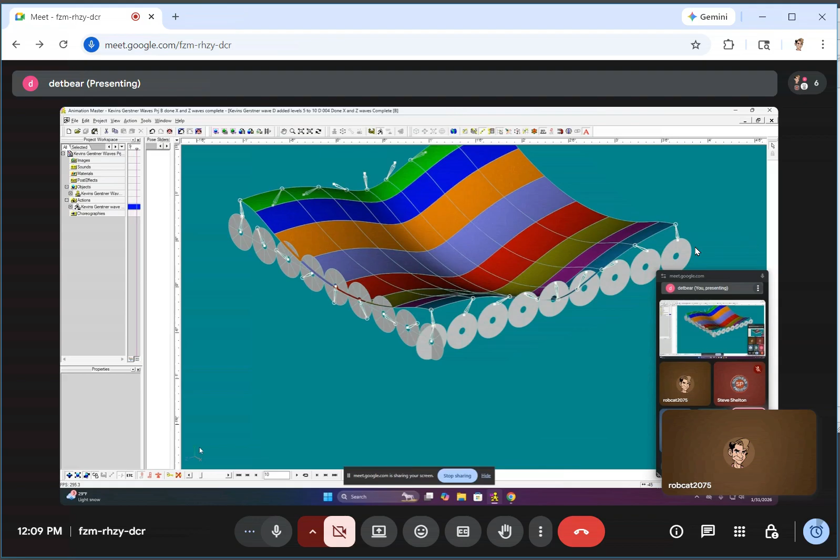So the CPs are not just moving up and down, they're actually moving left to right. And if I show you this from the front, every one of these bones here that are coming the opposite direction are actually moving and parented to this bone so that they're actually moving left to right. Let me show you that.

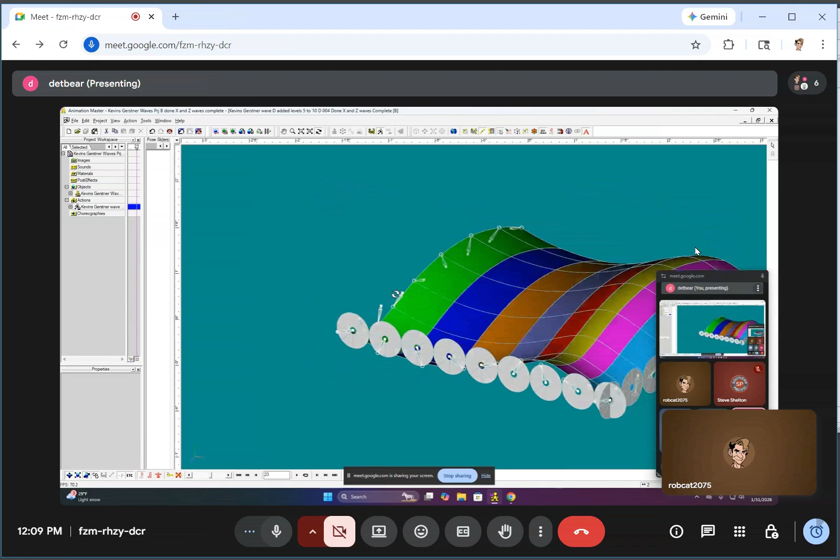Okay, see how they're all moving left to right? But at the same time, they have their own circle coming the other way. They're working also, you see that? How they're also going that direction. That's very effective.

So when it really gets complicated is when you have to go vertically, when you have to go not only diagonally, you mean? You have to go with a diagonal direction. So...

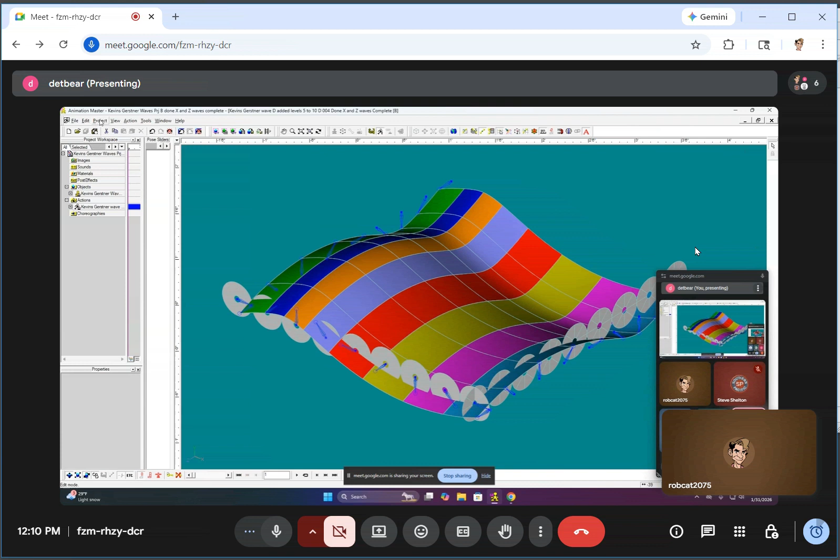Yeah, let me open up my vertical. Okay, so now I've set up spheres that are working this direction as well. This is when it gets wonky.

And the problem that I'm running into with this is just knowing which direction these things need to go in. But you can see this little bone chain here? I left this in here just to show you how all of these things are parented on top of each other.

So now you're getting directions both diagonally, and you can see these splines diagonal are going left and right as well, so they're stacked on top of each other. I'm almost getting seasick.

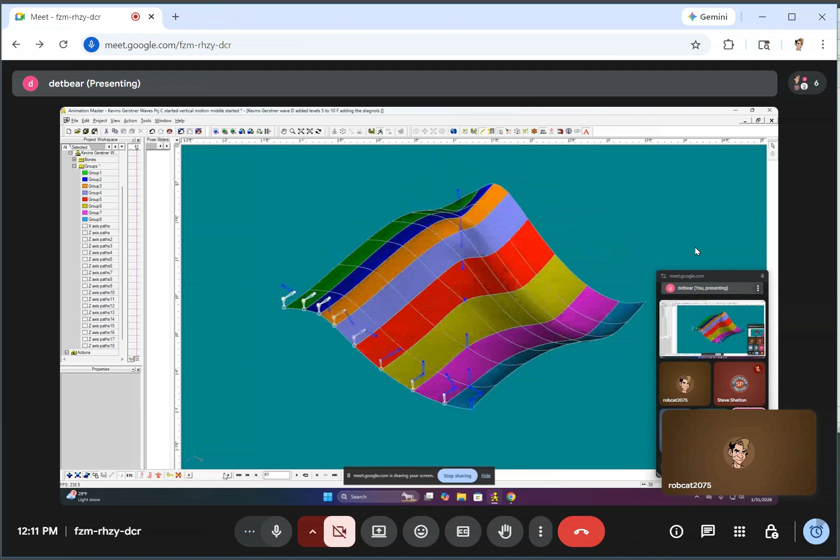It's like, whoa. So then you actually have this where it's working correctly, but it can get very complicated. Yeah, the diagonal is the one I'm not sure I quite understand yet.

Well, it is. Is the diagonal a child of that? It's the child of the second level. Okay, and the second level is the bones, child of the first. Right.

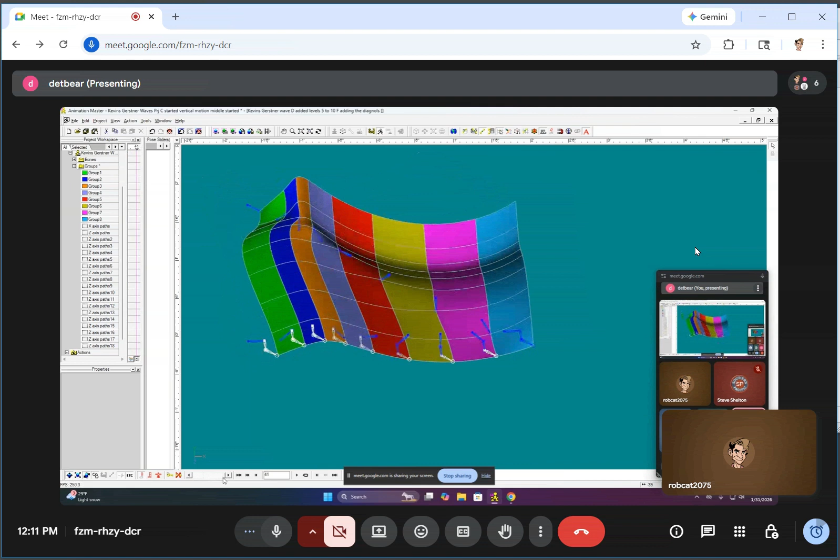And you could stack if I wanted to go also vertically the other direction, because this is just if I wanted to go the other direction, I'd have to do a fourth stack, which you can tell this gets really crazy. And there's more than a million ways you could probably do this.

Yeah, you could make a pose slider that shortens the bone. And you could do that on every level potentially, and you could make it where you could increase the size to basically have some kind of a wave system that would operate driven by vertexes or CPs.

I presume that you want to be able to shorten or lengthen those systems independently of each other, because if you shorten or lengthen the main parent, then everything beneath that shortens as well. You'd have to counteract that somehow, maybe.

I don't know, but the way you could counteract that is, instead of making a bone a child, you constrain it. That's what I'm doing currently, to the tip. Oh, okay.

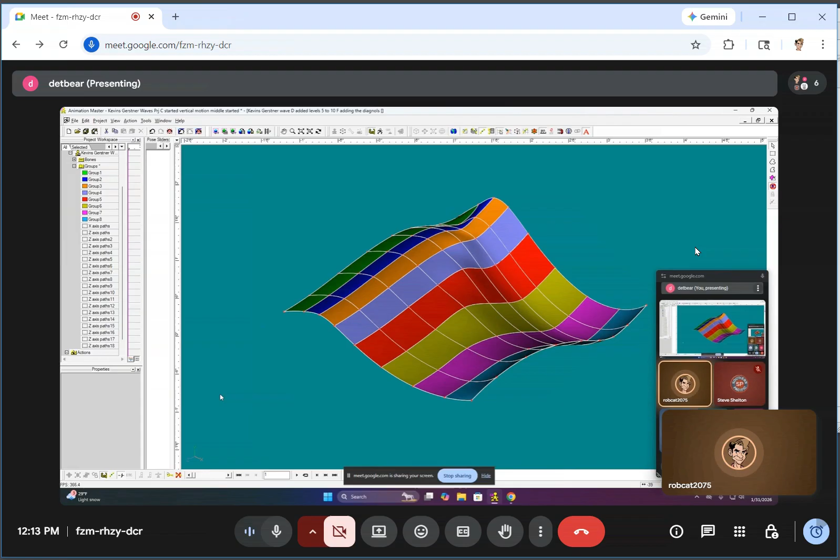So then you should be able to size them independently. That's right. So let's say, I know in a Gerstner Wave system, they have smaller waves on top of larger waves. Does that make any sense? Yeah.

And so my question would be, you'd still have to make it a tileable thing, or you'd have to have it working on a mesh. You wouldn't have to have it tremendous, but it would need to be a decent size. It'd be cool if there was a wizard that could set this up for you. I know, wouldn't that be cool?

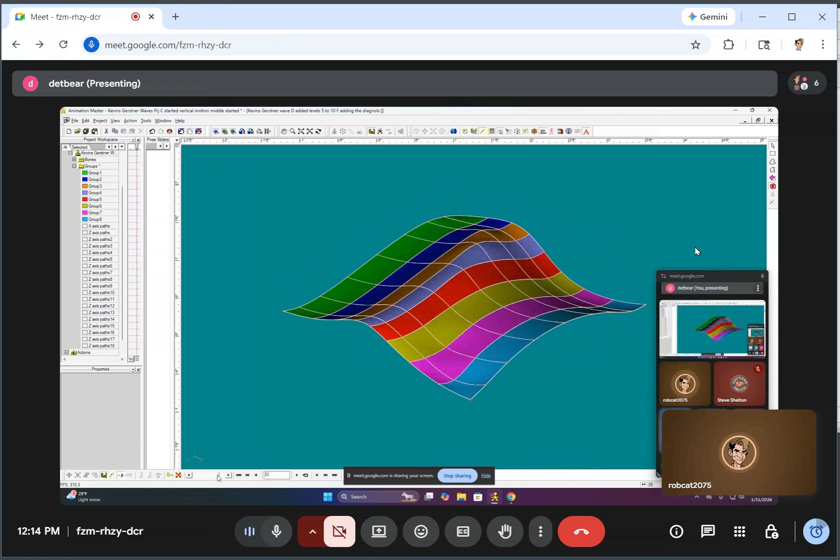If only, because someone... it does have a pattern. If only any of us knew how to write plugins for Animation Master. Does this make any sense, y'all? I'm so sorry. It does.

It does, but it's very intensive in the fact that, the way you're doing it now, if you wanted to have something 4 times that big, two patches, you have to have 4 times as many bones now, unless you redo the bones just for the object that's 4 times as big.

Well, theoretically, I would think you could parent the CPs to the bones in a base model. Does that make any sense? Depends on what you mean.

In other words, the first set of bones could potentially affect a larger scale model, more CPs. Yes, but by cloning those. But how do you... for example, the leading edge there on your lower right, which is I think your first level. Is it not?

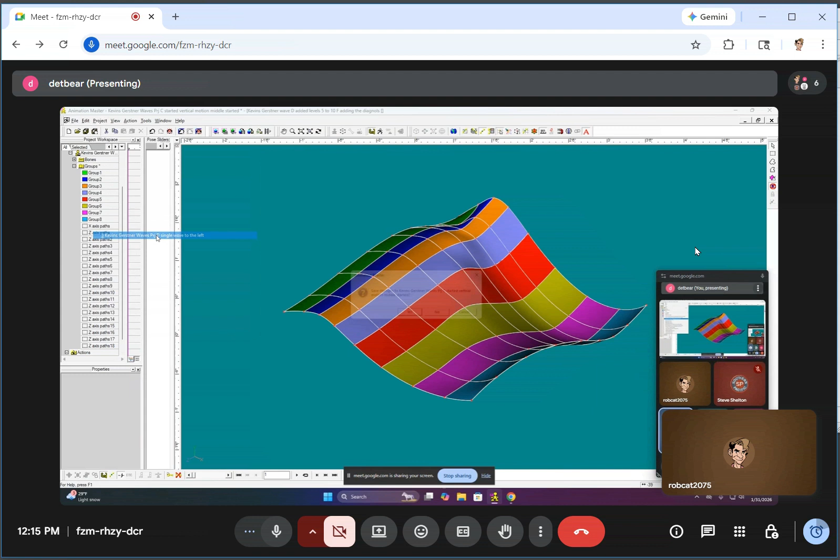The lower left side of your screen there. It's very complicated. Well, whichever one is your first level that you have the bones controlling, because you said the next one, the other direction, is not parented. This would be the first level, right? So now, in order to make this bigger with more splines widthwise, left to right, you have to put in more bones.

Is repeating this cycle enough, Kevin? Believe it or not, the CPs are actually being controlled by that top level. Those bones right there, when I add in the vertical, only the vertical is controlling any CPs at all.

And so, forgive me because I'm not the best teacher and explainer of this. I apologize. No, but on the first level, if you just have this model running this way, those bones are controlling those splines and CPs.

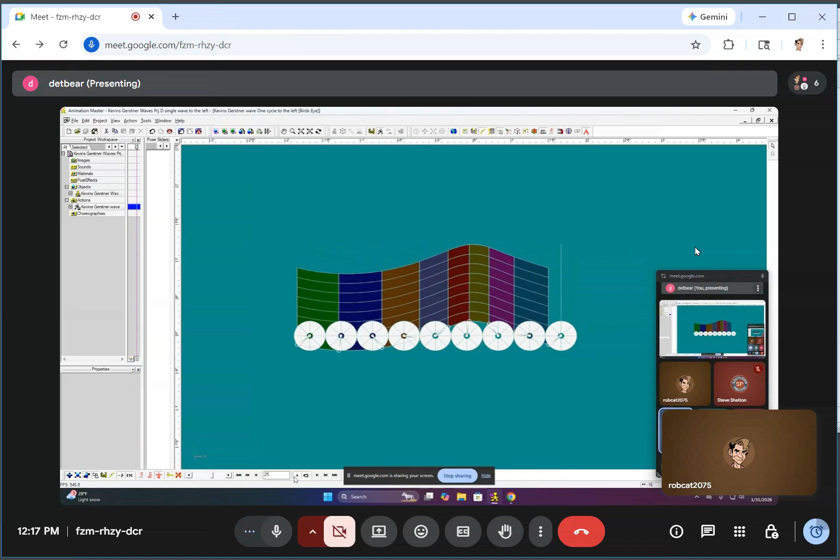However, when you get to the next level coming across, all of those CPs are controlled by bones that are being controlled by this base. Right, but you have a bone for each line of each spline, and the other direction is tied to the motion of that.

So basically, you need, for 2 levels of motion, this level and the next level, basically as many bones as there are CPs. Am I correct? That's correct. Because each one of these vertical lines we're looking at will have a bone for each of its CPs. That is correct.

And each of those vertical lines will have its own set of bones. That's correct. But once you get to that vertical level, however many levels you go, the very highest level is actually the only bone that's controlling. Yeah, that makes sense, right.

Okay, so as far as could this be done by a wizard? Yes, because it is such a mathematically predictable process. I would think so, definitely. But you're almost back to where you were, where you had a bone on every intersection of the CPs. Yeah, which there are mathematical...

I guess it would be C++ formulas that do this automatically in these other systems that are building, like in Unity — not Unity, but the Unreal Game Engine. And I'm sure in Unity too, but those are completely different platforms.

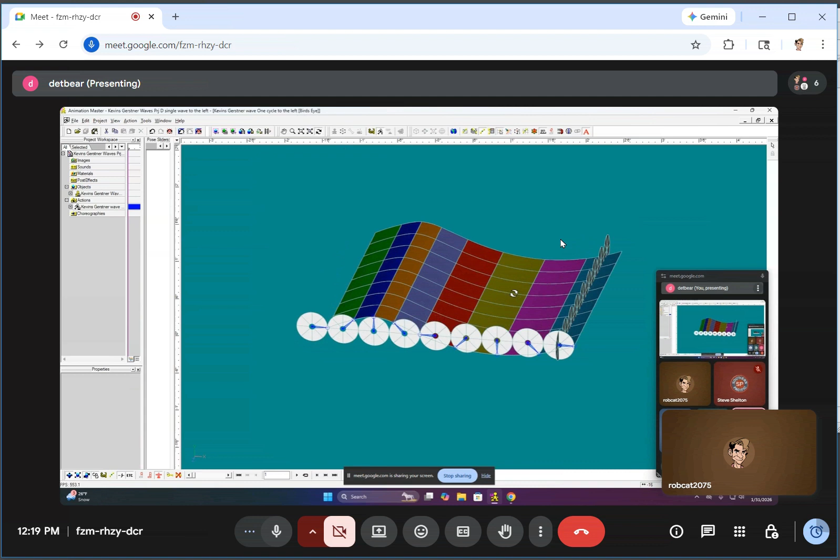The only thing I have is creating a water surface or a fluid surface that has some kind of controllability, if that makes any sense. When you say, well, what's the control you want that you don't have right now?

Well, if I'm just working in two directions, it's not really going to give me a surface unless I put a really good texture on it, or if I stacked something like what y'all are talking about — if you took this model and had it running and also had an animated texture.

I think you would need an animated texture on this just for fine detail to make the thing look a little bit more random. Not that it's going to displace the surface necessarily very much, but to just add a little bit of those randomized ripples that don't seem to be going anywhere but are always there. Correct. In the body of water. But that's a different issue from getting these mechanics to work. So that's something you would add after you've got this working.

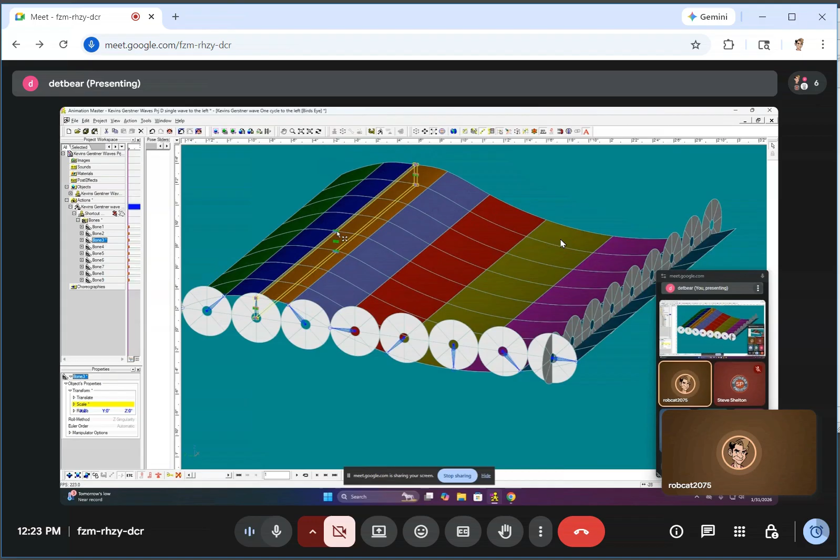I remember a long time ago I saw someone demonstrating wave motion in a tank. It was like a really long aquarium, and it had a little paddle at one end that would force a wave along, and he had little corks tied to strings along the length of it, and you could see that the cork didn't actually go up and down. It went around in a circular motion, much like you were demonstrating here. Right.

Oops. Did we lose him? I just stopped sharing my screen. Oh, okay. Go ahead. Thank you all for looking at that. That's just what I wanted to show.

Well, what's the next problem you have to solve on that, Kevin? I'm just trying to make something that I could plug into. I've run into this for years, for 20 years.

When I create projects, they seem to need water. They seem to need a water surface. Okay. And I'm trying to just slowly work on something that I could bring in, that I could tweak and turn into what I need it to do. And I haven't really found anything that was satisfactory, and I'm just trying to work on something that would work, that would look like a fluid surface. Yeah. And these things are created in other packages, and I would think that Animation Master could do it. I'm just trying to create a way that I can do it.

Have you tried putting the texture on top of that to see how it would look? I have not, but I think even if you put like one of those foam images with water with foam on it, you'd see where that foam would squish and stretch, and it would look really cool. Yeah. Because the way that Gerstner wave works, it emulates the way a real wave would.

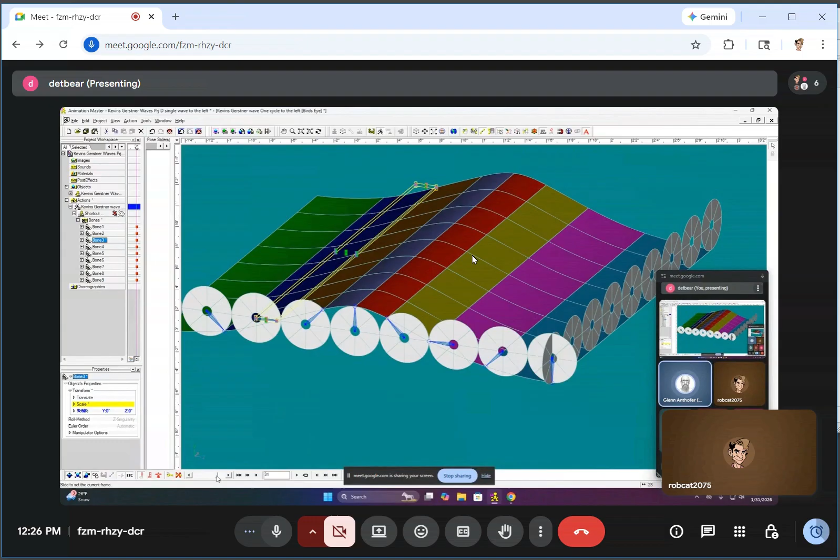Yeah, and when you were showing varying, for example, the one spline, you don't want to necessarily vary the one spline all the way to infinity of your model of the surface, right? You're saying like maybe sections of it also. There might be a range from like 0 to 2 that would scale, like 0% to 200% is the most you'd want to change. Yeah, I would imagine.

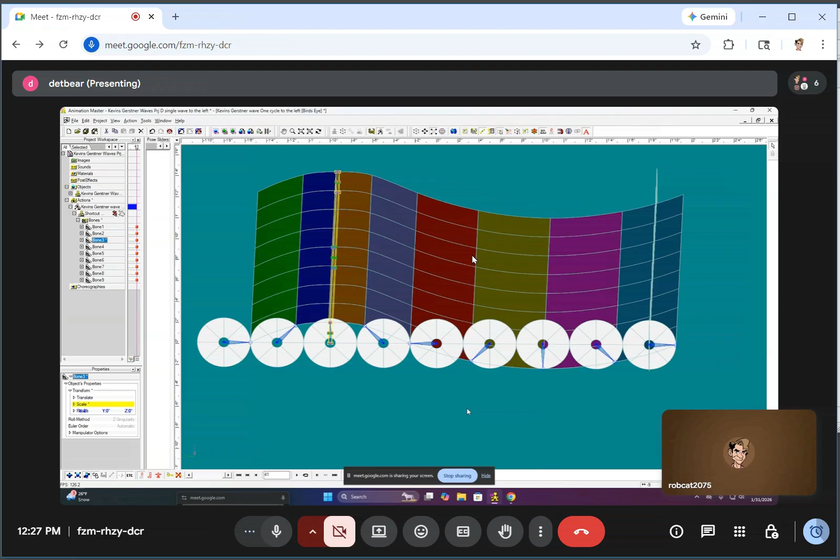And forgive me because I realize that making Sea of Thieves water in Animation Master is probably going to require a crazy amount of doing, but basically just trying to see it as in levels. Like if you look at levels of the way those water shaders work, there's a lot of little ripples coming this way and that way. But if you can get something down that's a base, you can put like a texture on top of it. Mm-hmm.

If you had both ways, X and Y, and then you had vertical one way and vertical like an X, vertical both ways. By vertical, you really mean diagonal. Diagonal, I'm sorry. Yeah. So along with diagonal, you would have to have a way also, and it's very complicated. For me, it has been. But you need this thing to be able to run one way or the other as well. Like if you have the wave going to the left, you need it also to go to the right, and then you also need to have the

in all directions. What would that be? 4 directions? So you want it to go east and west, right? You want to be able to have the waves going east and west simultaneously, and north and south. So that's 4 wave systems. And then you want diagonal both ways. Yeah. So 8. It would be cool if we could make just one system and then turn it to any angle we want and somehow add 2 systems together.

And also at the same time, the speed of everything working where you could change the speed of it. Right, because you don't want every direction going the same. Right, and you might want the waves to be going slower or faster. Do water waves have a standard speed? I'm wondering. Well, wind is a factor, probably. No, not a standard speed. I would think not.

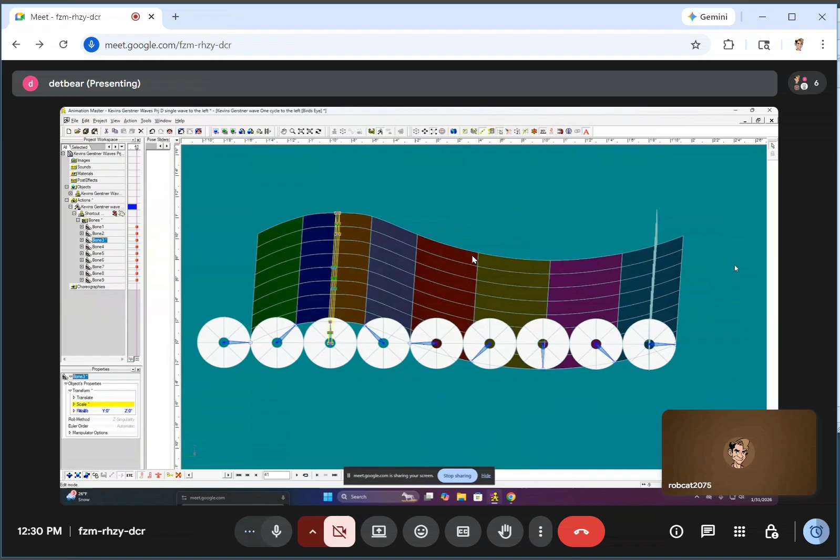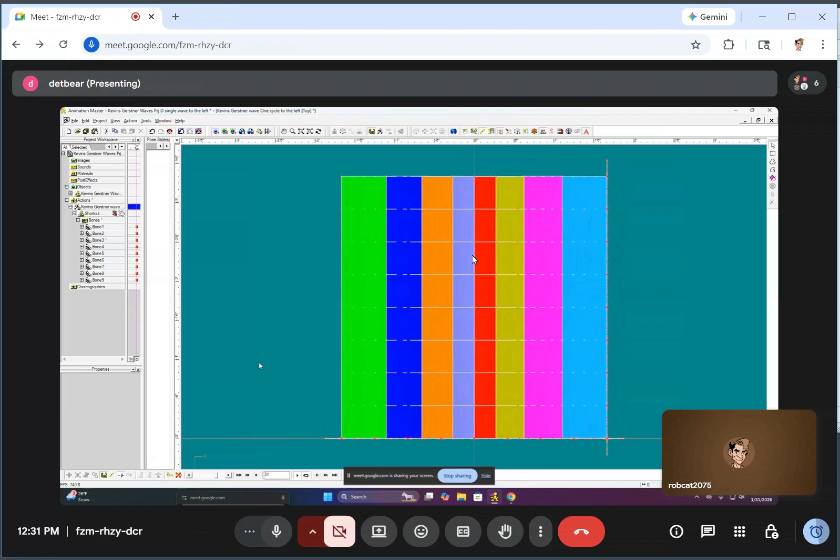How close are you expecting to be able to come, or do you want to come? When you're way far out, a boat on an open sea, you obviously don't need the detail, and to use the same complex mechanics for a big open sea shot, as opposed to a close-up where you see the boat rocking in the water and going against the side of the boat, would be different than if you're going to be way out. Right. I guess that would get into the issue of how much geometry you would need to cover the space you needed to, right?

Yeah, from my point of view, I think you'd need at least two different sets of something for a distance shot, but then you have something like this, more detail, so that you could see up closer. When you envision it closer, you could have more actual physical detail of it going up, as opposed to having, I want it to be accurate no matter where I'm shooting from. Well, you can do that, but now your resources are just.

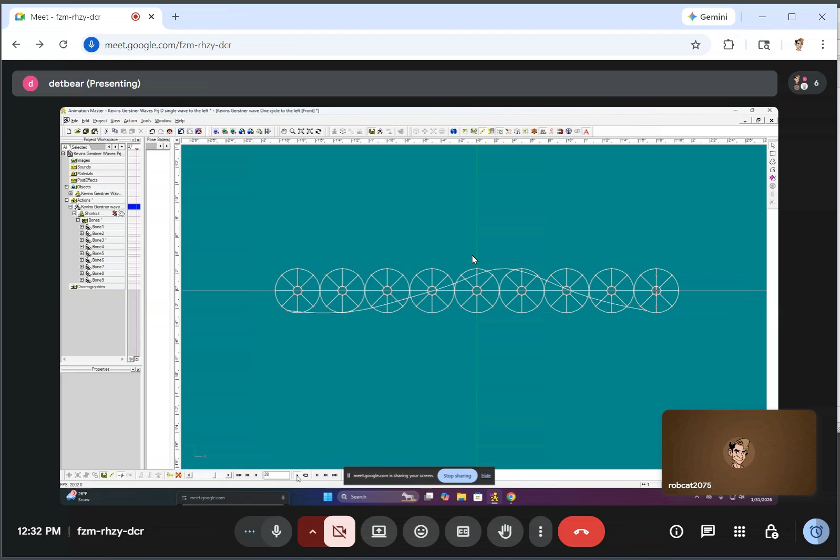This is where the procedural texture becomes useful, because that has sort of infinite range, and you can zoom into infinite detail if you wish. Yeah, so once you got the motion that looked as close as you needed, you could calm it down, you could have calm water as well, but it would still be rough. Okay.

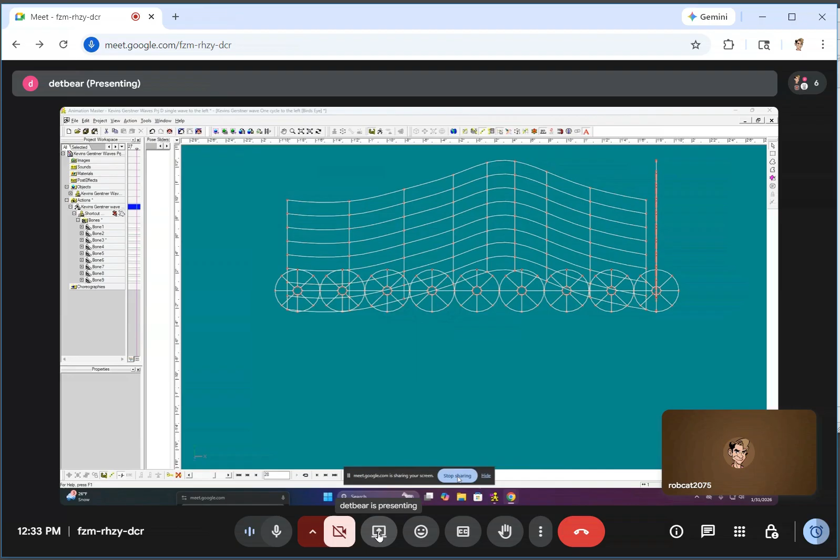If we could make this motion as muscle motion instead of bone motion, it would be easier to combine different directions, because muscle motion in an action will be additive. Let me show you what I was working on last week as far as doing this with pose sliders instead of bones. So that means I have to find this thing. And since you were only dealing with basically the up-down y-axis. Yeah, it won't be as interesting a wave motion as you have there, Kevin. With the muscle motion, you could do it in a circular motion, as opposed to a linear up-down motion also.

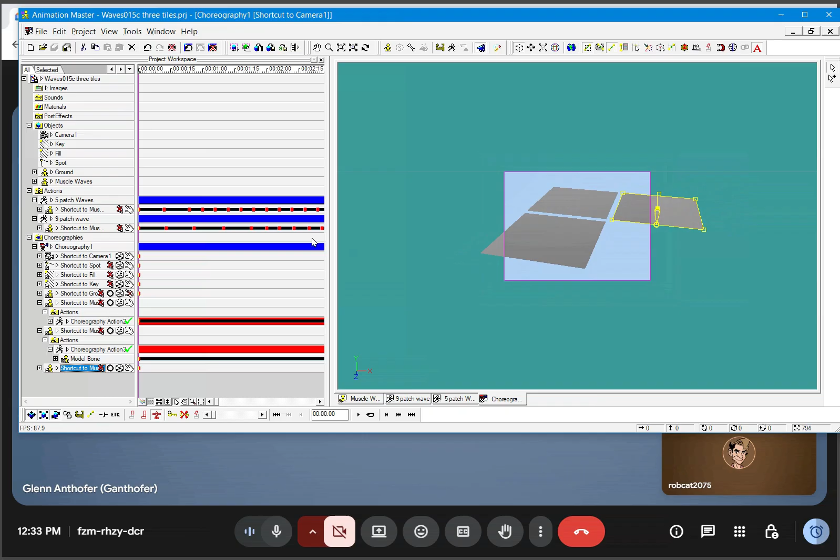Let's see here. Did I stop sharing correctly? Yes. Let's see here. Okay, I'm not sure I found the correct one, but we'll give it a gander here. Okay, do you see my screen? Yeah.

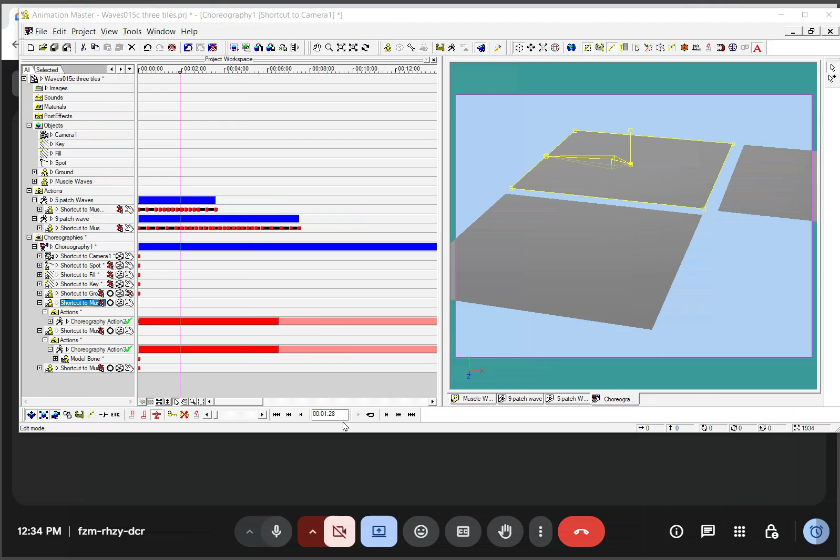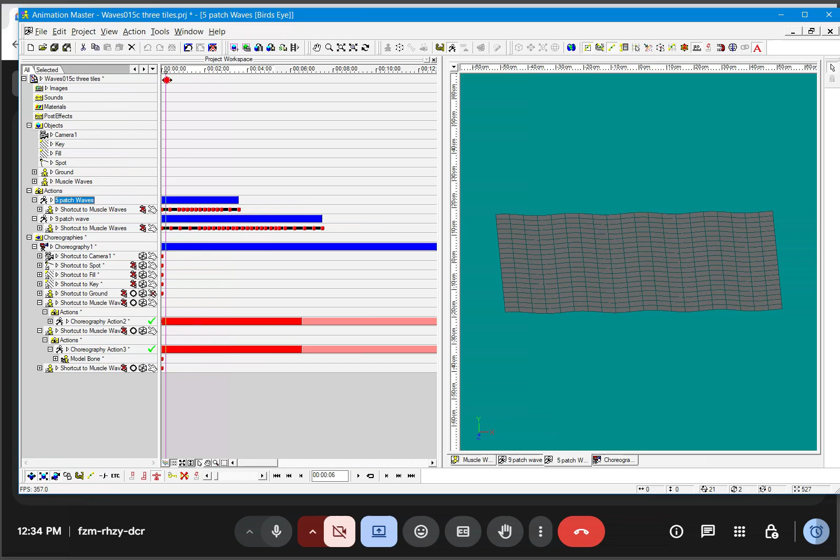This is my basic patch here. And I've made two actions. This one has waves that are 5 patches long, and they go east to west. And this one has waves that are 9 patches long, and they go in this direction instead. So there's two independent actions that have the waves going in different directions.

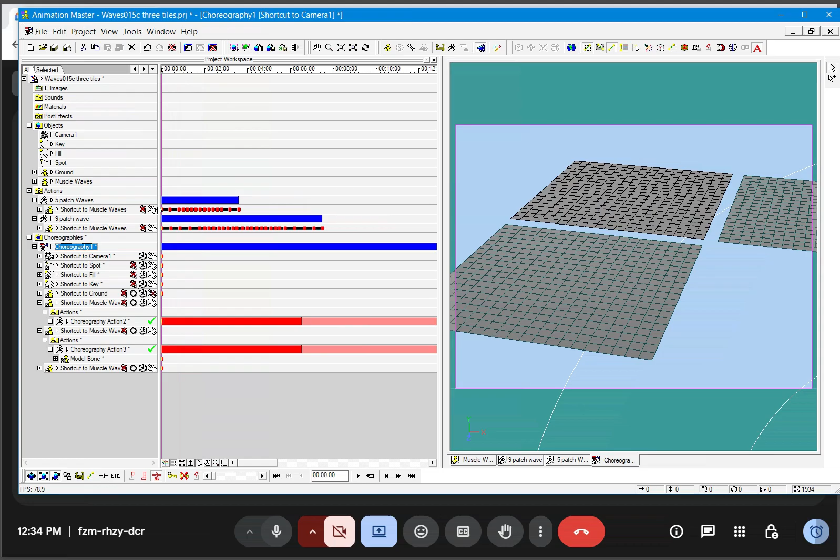If I add one of these, let's see. I'll do it to this one. I'll add the 5 patcher. And I need to make that repeating, so I'll give it 10.

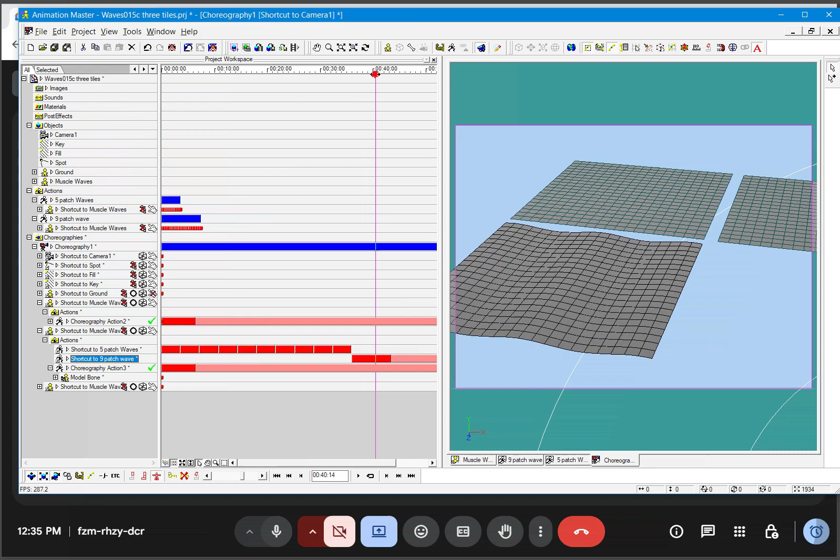So, those are repeating waves, I think we would agree. Now I'll add the 9. That one is out here. So here we have the 5s and the 9s. If I move this in like that so that they're overlapping, and I guess I've got to make it repeat. Let's do that, 7.

And I have to change this one to add. Let's see if we have 2 here. Okay, there. So now we have 2 waves in 2 different directions. At different periods. Yeah, different periods, different wavelengths. And we also have the option of playing around with the cycle length in each of these to make them move faster or slower.

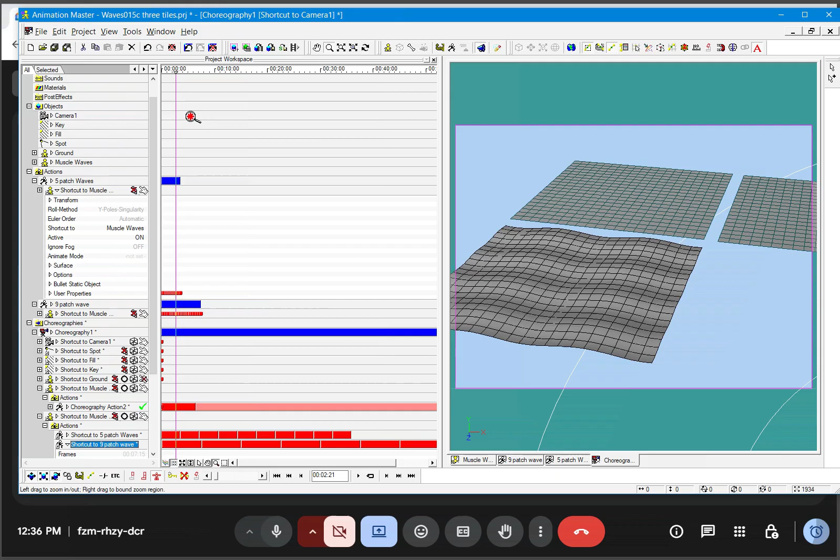And I haven't found an easy way to do this, but let's go look at, here we go. So these are the waves. They are made infinite by using pre-extrapolation and post-extrapolation. And if I wanted this particular wave to be in greater intensity or less intensity, I can scale them in the action, like so.

So you couldn't put that on a slider? Perhaps I can. I hadn't really thought of it because I hadn't gotten far enough to want to do that. I started out with these at like positive 10 to negative 10, which was too much, and so I scaled it down. I think you probably could put this on a pose slider, except now,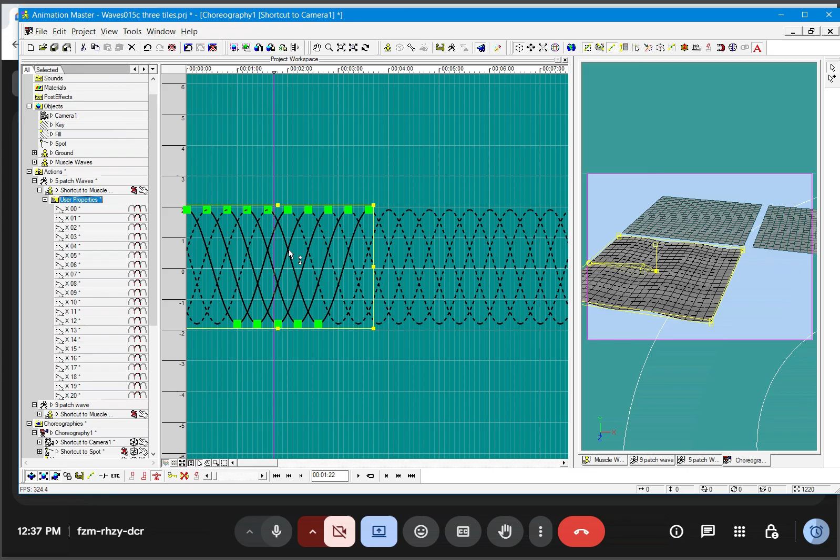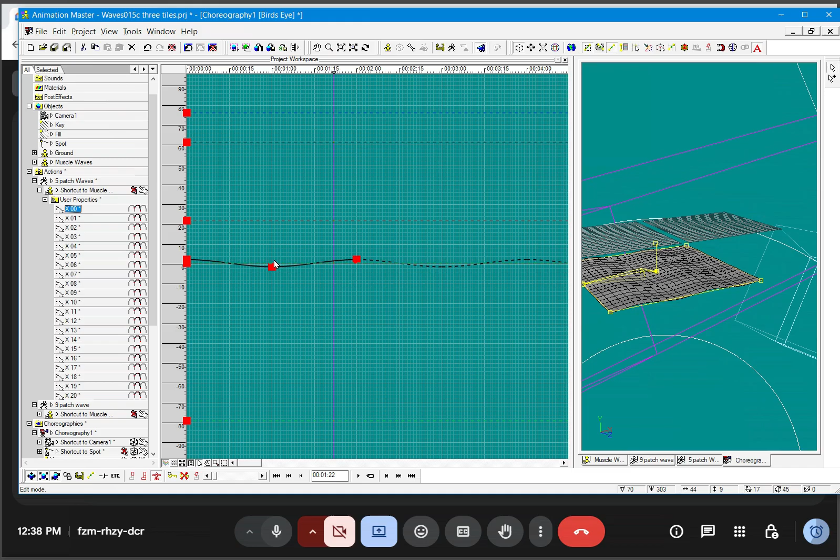if you duplicated that, but in the, what axis is it? That's the x-axis is up and down because it's referenced from the bone. Well, it's the y-axis. Well, yeah, but is that in the actual properties? Is it affecting the y, or is that the actual bone, which is then the x-axis of the bone? There's no bone motion in this. This is all CP motion. Okay. So then you'd have to, let's go back to look at the action.

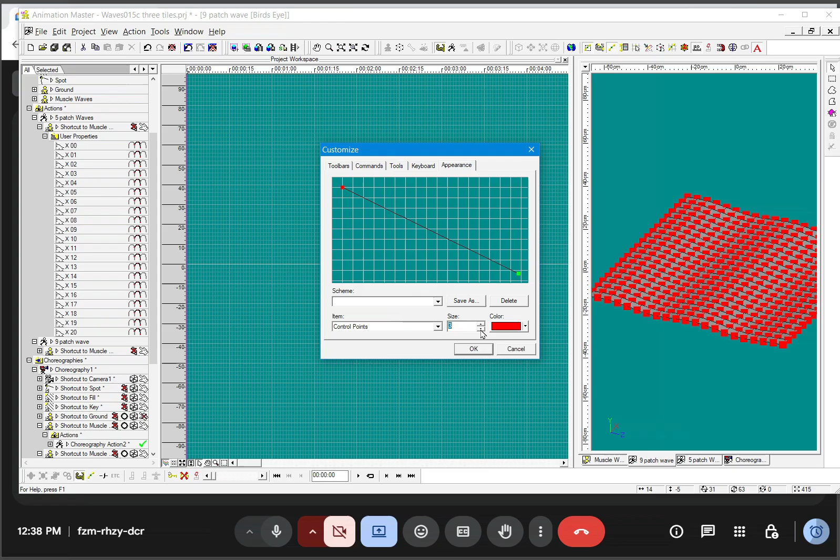For example, let me make my CP smaller. Oops, I need control points. Okay. Let's look at the model itself. It has a set of pose sliders. So each one of these controls a row of CPs in the X direction. And each one of these controls a row of CPs in the Z direction.

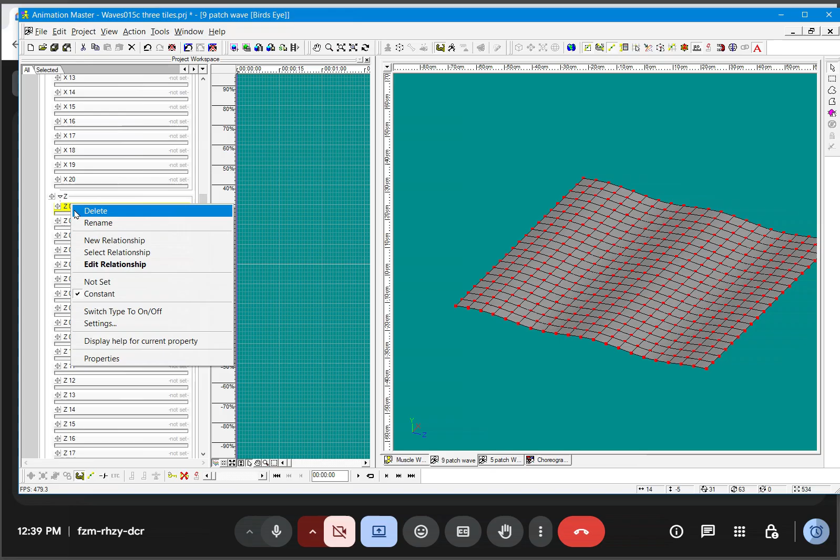And let's just take a look at one of these. And I need to get back my, there we go. Okay. So, for example, I don't want to make any keyframes here, but remind me to revert this or something. Let's see. This one slider controls the vertical motion of that set of CPs. Right. And so when you stagger these, they're up and down, waving back and forth like that, you get the wave motion. That's not set. There we go.

You set up each of those individually, Robert? Yeah, that didn't take long, maybe a couple of hours. That looked like a lot of work. Well, you know, compared to doing bones, I think a lot. Now, the question is, how could we make this do circular motion instead of merely up and down motion? I think there's a way.

Yes. If I had another slider, so for example, this slider does vertical motion, and this one is called Z00, if I had a Z00B that goes like that. So you could set up that circular Gerstner type circle in there? By carefully manipulating the horizontal and the vertical. Basically it'd just be a sine wave on each one, but they'd be in opposite phase, and so it appears to be going in a circle. Oh, okay. That seems complex. Let's try a simple case of that, and let's just see if it's really possible.

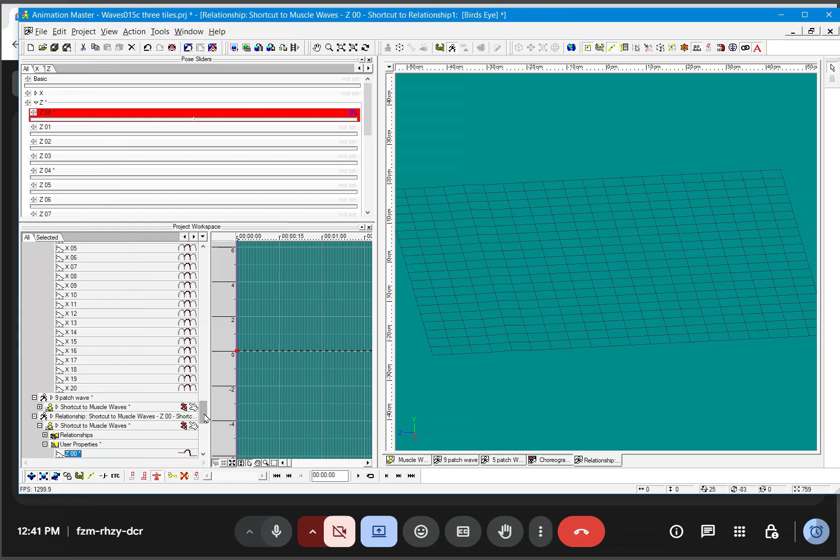Okay. Let's make a simpler model. So, I'll make a grid. I'll make it 5 by 5 or 4 by 4. No, let's make it 5 by 5. And it's on XZ, so that'll be horizontal. Here we are looking over on top. Okay, let's pick one of these. Oh, I need a new pose slider.

And I'll go to muscle mode. And I'll pick this one here. Does it matter which one I do? Should I do this one at the very end? Let's do this one here. So that's 0, 1, 2. And that's in the X direction. X 0, 2, we'll call this vertical. We'll do the vertical motion first.

Okay, and I'm going to set this to have a minimum of -100, so I can go both above and below. So there's our 0, here's our 100, and it's this CP. I'll move this, let's say this is maximum here. I think that would be 1, 2, 3, 4. I'm guessing that 4 would be the most we'd want to go up, since 4 would be the same distance to there. But let's go to 5 just in case. So I'll turn on my snap to grid and I'll tap this up.

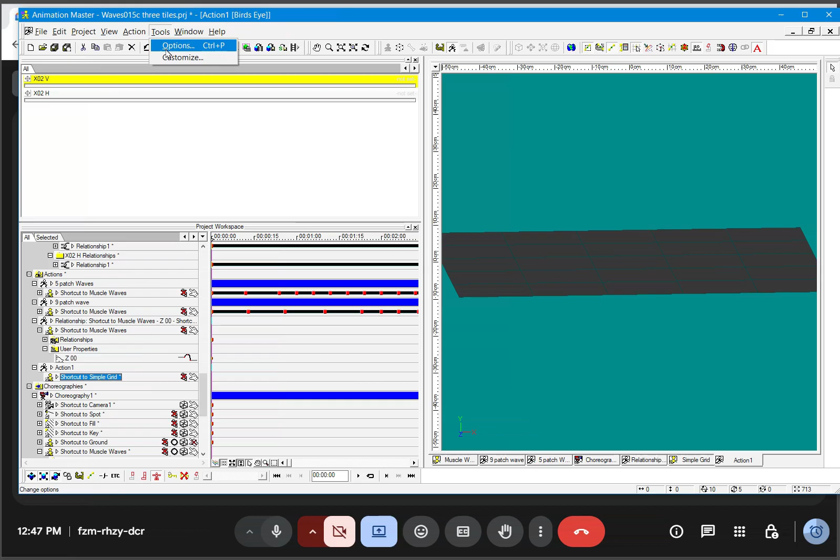Here's my action. And I really only need to keyframe the peaks. So let's, I want to change my spline color so it is more visible. Okay, there we go. How long should it take? Should it take 2 seconds for that to do its thing, or 1 second? We'll see here.

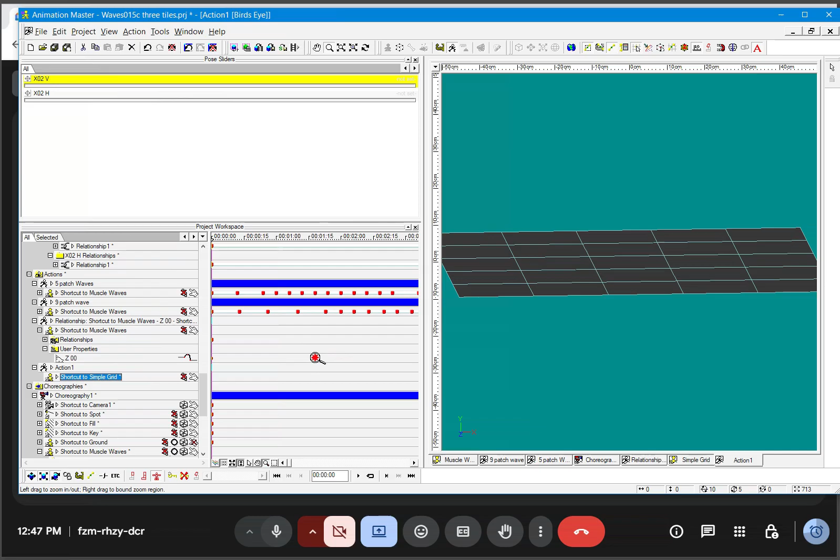This one all the way over. Okay, so that's the starting point. And then at 1 second, they'll go to their opposite magnitude. And then they'll return at 2 seconds. So our action now is just a diagonal motion, but it is a cycle.

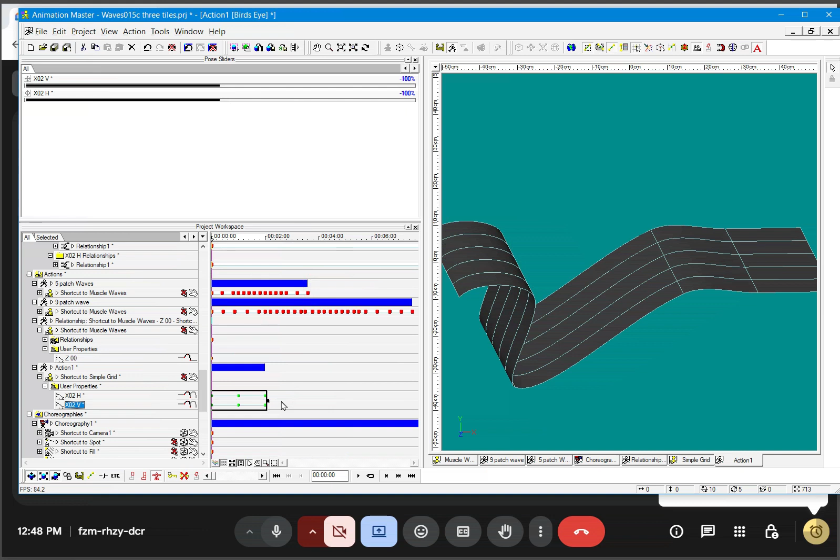If I move one of these and offset it, let's make this a little bit more continuous by selecting these and doing curve, post-extrapolation, repeat. And now we should have continuous motion here. Yeah, okay, so that'll continue infinitely. Now, here comes the tough part. Let's see, I guess I move it like so. There we go. There's circular, almost circular motion.

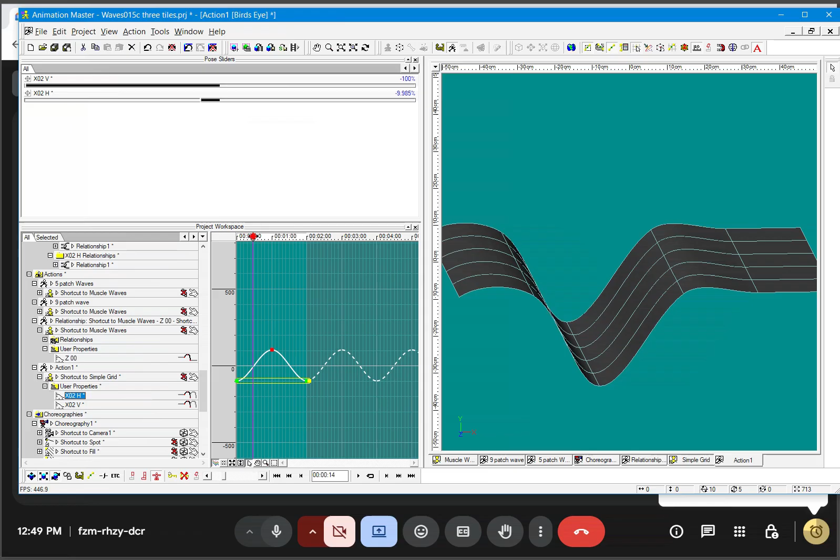Let's see. Oh, I have peaks on my, yeah, okay. I need to zero slope, interpolate. Slope that one, and zero slope this one. And now we should have something pretty close to that. Ought to be an exact sine wave, but I'm not sure if it is or not. But it's pretty damn close. So now, let's see what we got here. Let's look at it from the side. That looks like circular motion to me.

Yeah. Now, if I scaled these down, I want both of those, we would get, it wouldn't be overlapping the, yeah, that kind of distorts how it looks because it went half. And perhaps there's a way to make a pose slider to control this generally. Kind of looks like a wave breaking almost. Yeah, that's probably what happens. So let's move this down to 50.

Whoops, this is the part I hate. Okay, how did I lose that? Okay, let's move this one up to negative. What have I done here? Okay. That's interesting. I have no idea where I am now. Let's see if this actually gets us. There we go.

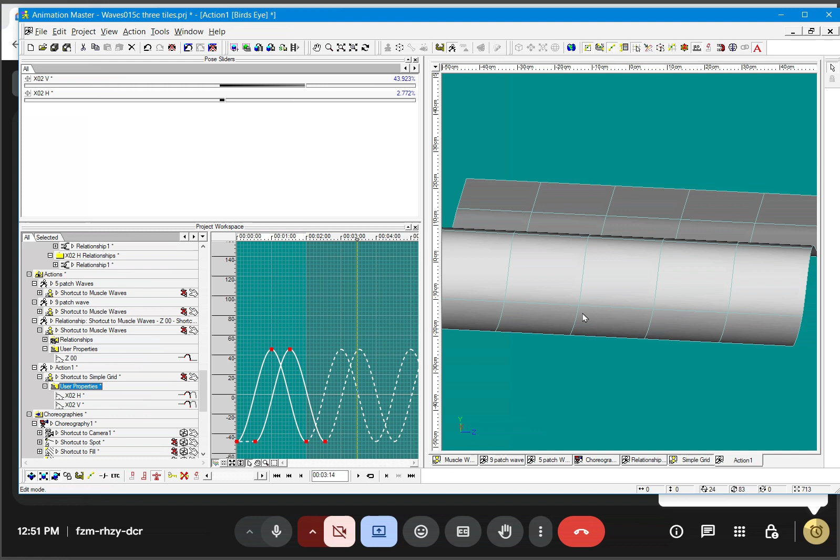So if we did the same thing with circular motion on a spline, we could add those two together. Would that make horizontal or diagonal motion easier, Robert? I'm sorry, it would, diagonal. You wouldn't have to have those bones that are children of bones that are children of bones. But would it work diagonally? Because you don't have splines, you'd have to take every CP diagonally. Oh, you mean the diagonal? Well, let's try it and see what happens.

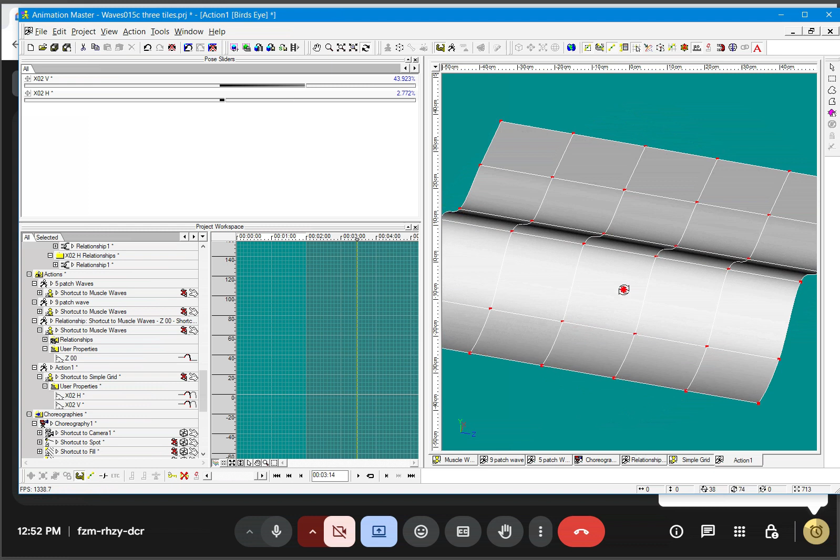I think it would be pretty much the same motion, because you're selecting CPs with your muscle mode, not spline. It just happens that every CP you grabbed was on a spline. There's nothing stopping me from selecting like that, or even at 32 degrees, you could find out what it was and select roughly. So if it did work diagonally, because when it comes to ocean or fluid waves, it needs those diagonal directions. Does that make sense?

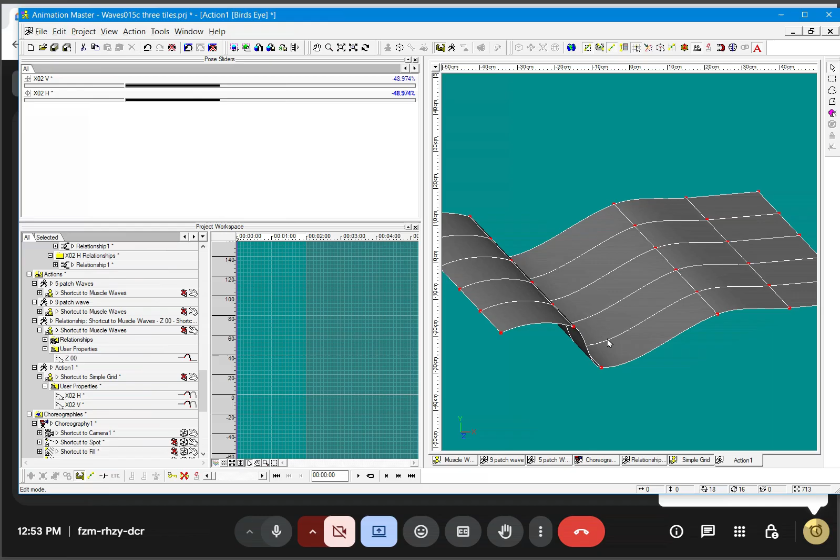Yeah, I think in real life there's probably no law that they're all at 45-degree angles. It depends on the currents flowing and the wind directions, and then you get a wind from a different direction. By having this wave motion as an action made with muscle motion, it's possible. It's easy to scale the motion, and it's easy to change the frequency by changing the length of the action in the chor.

And I'd say everything that you want to do is doable this way. The only real hassle is you'd have to make a slider for horizontal and a slider for vertical for each set of CPs. But I think that early penalty would pay off in simplicity later on. Correct. Does that make sense, Kevin?

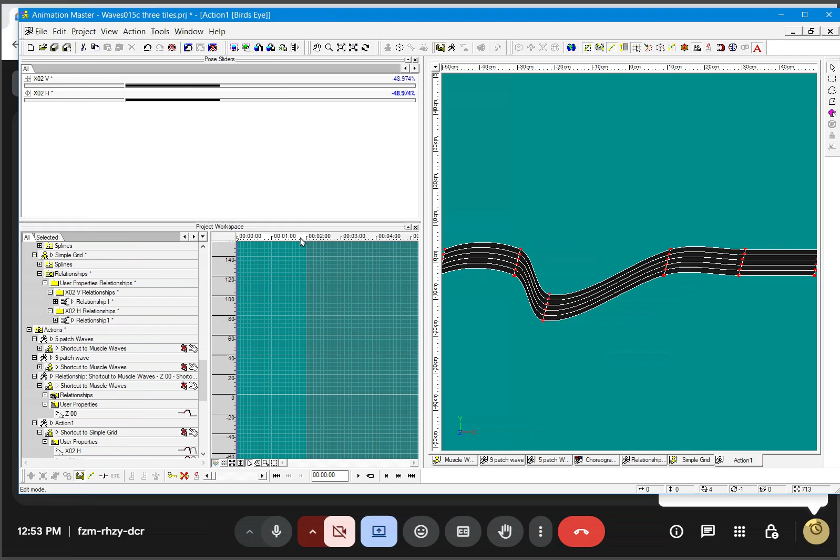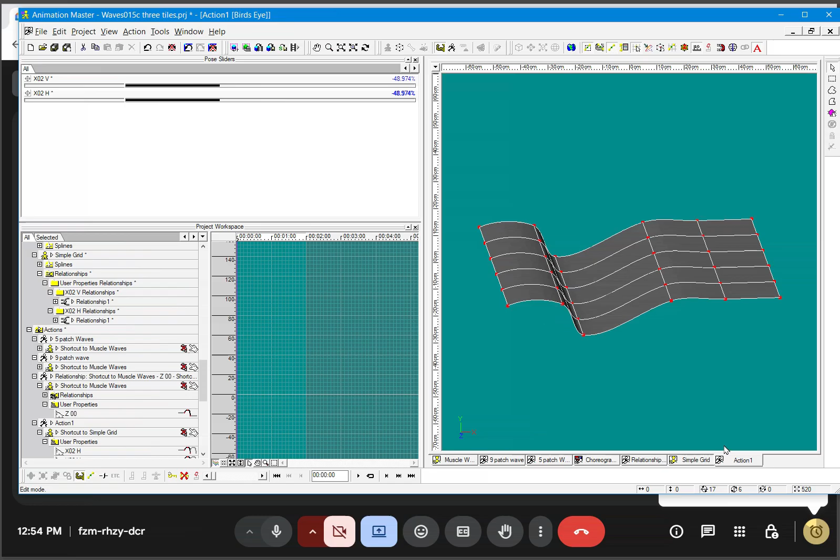Yes. And do you think it would be a tileable situation, Robert? Well, this is something Glenn and I were talking about last week. If I hear Glenn correctly, he thinks you're going to run into a lot of problems. I can see that - not for grabbing that, but you won't want this wave portion to continue on indefinitely along that spline, because you want to be able to vary it. Now the varying, you'd almost have to go into muscle mode and add a few little tweaks here and there over time to make it work.

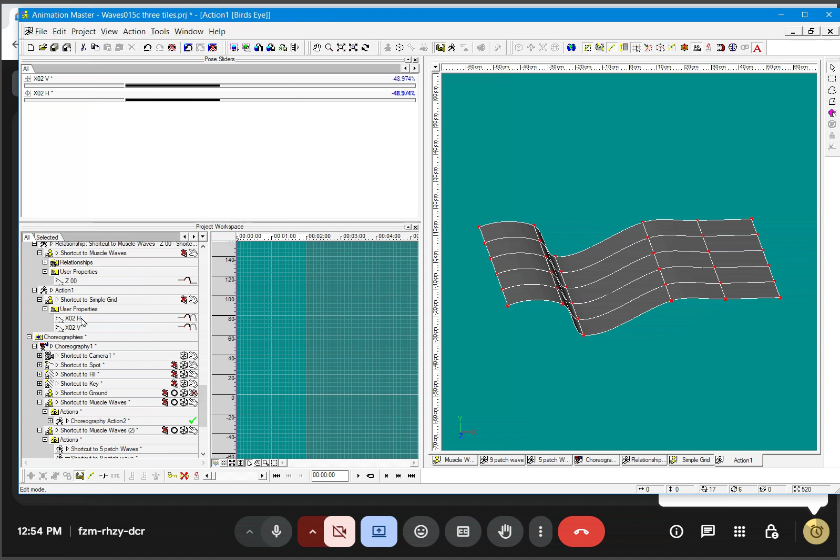I don't know how you'd get that, unless we talked about adding a random function, some kind of mathematical function on top of the CPs, where every CP could randomly have a little bit more or a little bit less. Yeah, I'm going to turn off the post extrapolation here. I get it.

Okay, if y'all get a chance, look on YouTube and look up Sea of Thieves water system. That's something to look at, to see kind of - I mean, it's way more advanced than any of this, but it's built on kind of the same principles.

Notice I'm just copying and pasting this to make repeats. And so what I could do - okay, right now these are all the same, but I could go and make some of them a little bit less, vary it. I could just go in here and randomly drag these things around.

I would think to make it easier later, you would need some kind of slider that would randomize that. You could do that, I think that's also possible. If we had a slider that changed the magnitude of one thing, you could vary that during the course of your animation. Right, so that would be possible.

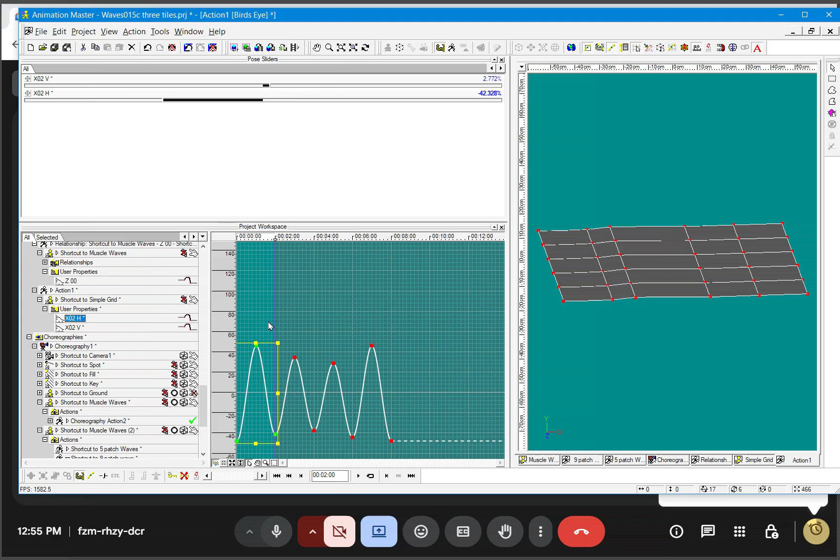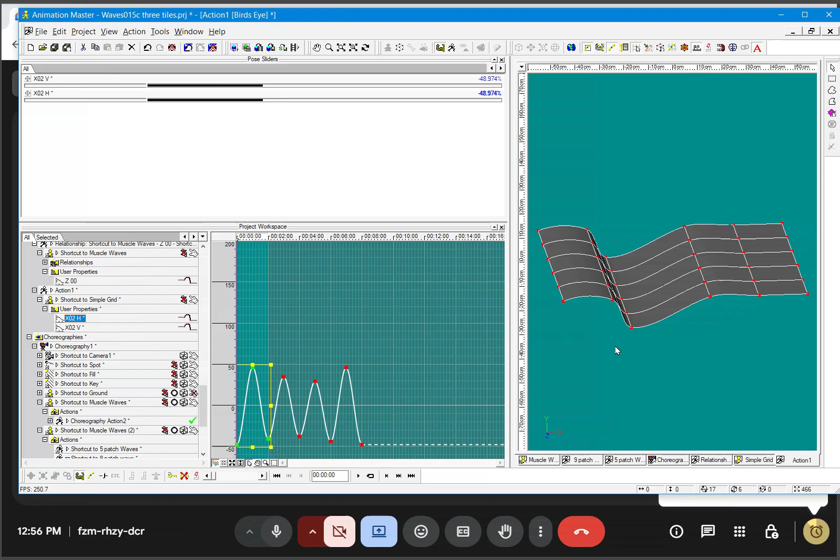That is all cool, though. I would love to see it working together, not in a random way, but just the way you were building it originally. I'd love to see like a diagonal, one way, every direction.

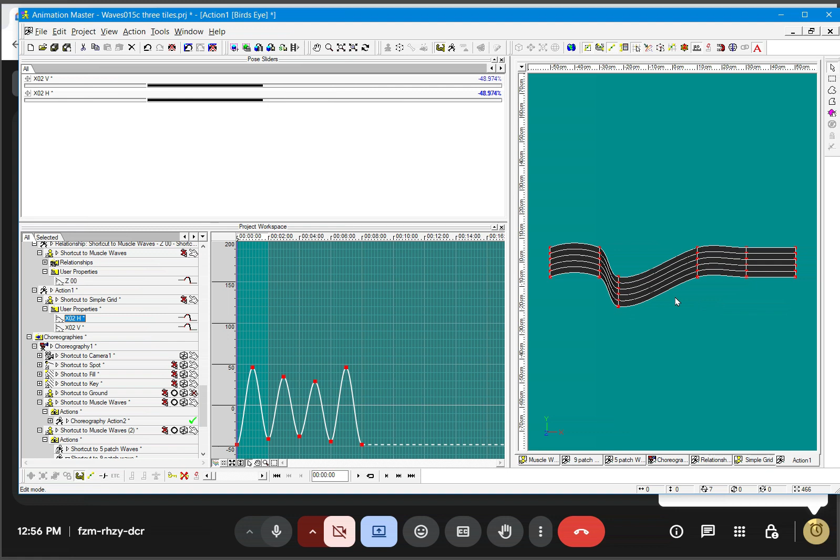Yeah, well, I think doing this circular motion with the two sliders, that is the answer to not having to use bones. And doing this motion in an action is the solution to being able to combine these things as you choose at a later point, instead of building it into a bunch of bones. So, I mean, if I were you trying to use that Gerstner stuff, this is the way I would go for creating the circular motion.

Now, as far as tiling, let's see how much time have we got here? We've got 7 minutes. What we were thinking of - so right now it's like you're dealing with a 5x5. Oops, that's not what I want.

Are you seeing my desktop here? Yes, okay.

I think what they did in Sea of Thieves is they added a randomizer so that there would be no pattern at any one time. I have no idea how they did it.

As far as tiling, right now, I looked at the previous example you sent me, and it sort of looked like you had randomized the up and down motion, and there were 5 bones. Then you sort of randomly assign CPs to those, and that got a very good effect, I thought.